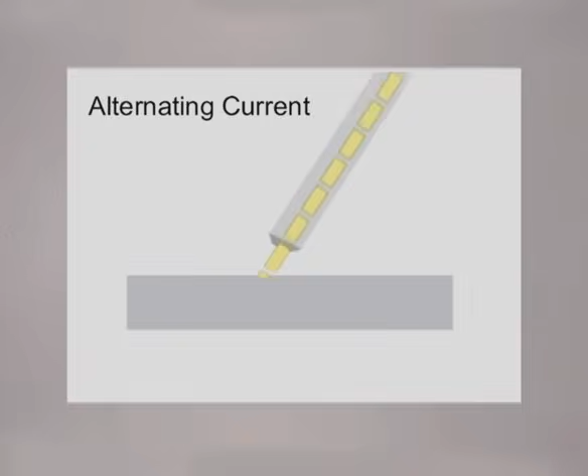Whether your welding machine is electric or portable, the power source will provide either alternating current or direct current to the electrode. Alternating current flows in both directions, creating an amperage lag. Certain welding rods have been designed with stabilizers in the flux to help maintain the arc through these lags.

Direct current welding machines provide a steady flow of current in one direction. The direction of flow, called polarity, is determined by how the leads are connected to the welding machine. DC plus with electrode positive is the polarity typically used for shielded metal arc welding.

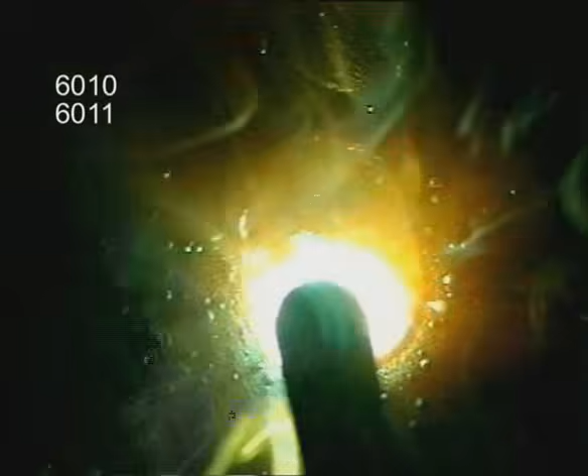All the common rods used for welding on carbon steel have characteristics that make them better suited for different situations. The fast freeze rods have a strong arc force that helps burn off surface impurities. A circular or side-to-side motion can be used to build up weld, or because of the light flux coating, these rods can be whipped to provide maximum penetration.

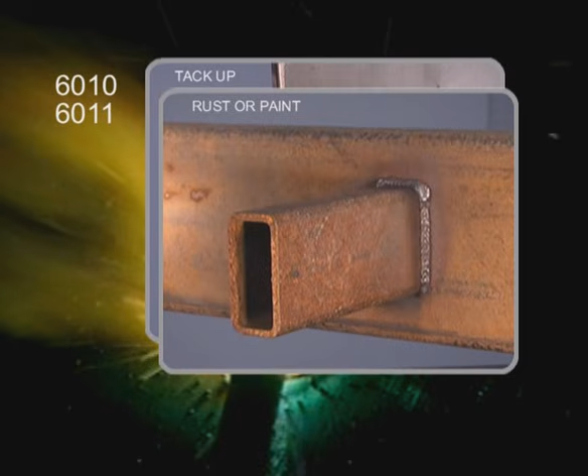In the vertical weld position, 6010 and 6011 can be run either uphill or downhill. These are good rods for tacking up weld joints, welding metal that is slightly rusted, filling gaps in poorly fit joints, and as a first pass for good penetration.

The filler rods don't penetrate as deep, they build up weld. Stabilizers in the flux make 6013 one of the simplest rods to use. With a slightly heavier slag covering, try to keep the arc in the puddle. 6013 can also be run either up or down on vertical welds. For general purpose welding, 6013 produces a smoother finished weld bead.

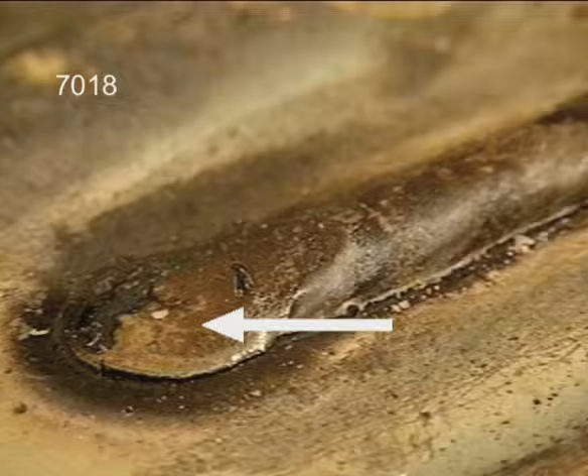7018 contains iron powder in the flux and low hydrogen characteristics. Except for directly under the arc, a heavy slag covers the entire weld puddle. Either running straight or with a side-to-side motion, the arc needs to be maintained on the leading edge of the puddle. In the vertical position, 7018 is run uphill.

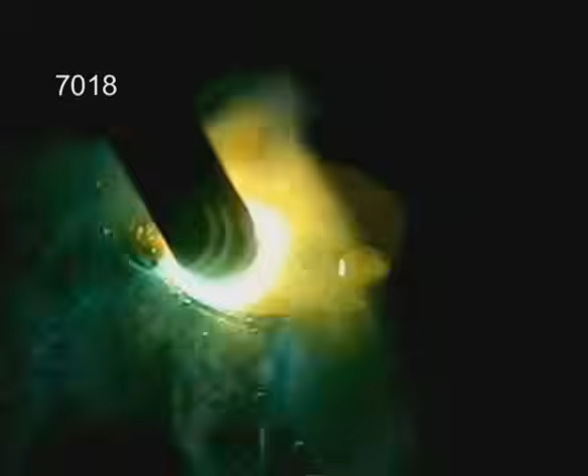7018 requires better rod control, but does provide the strongest welds for heavy stress situations and also the smoothest welds for ornamental type projects. Welding rods are available in different amounts, and it's a good idea to have both fast freeze and filler rods on hand.

Cover yourself up. Wear some good gloves, a hat, keep clean lenses in your welding hood, and always wear safety glasses. Before you light the rod, get comfortable. Scratch to light the arc. Bring the rod back and start the puddle.

Maintain a uniform arc gap with the amperage set high enough to let the puddle spread out. The molten metal follows the heat. Make sure you're filling in along the edges to avoid undercut. Add a little extra metal to the puddle before pulling out back over the weld.

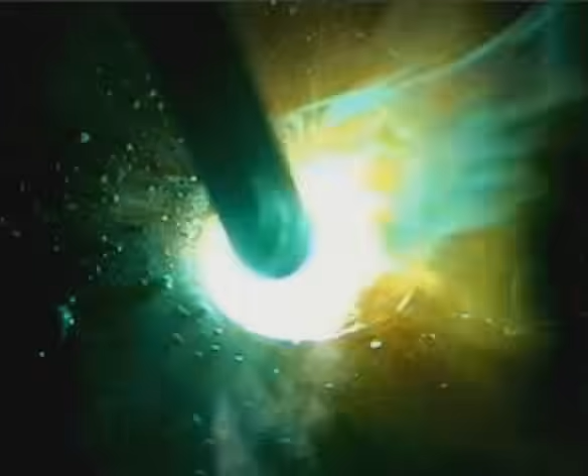You should always examine the finished weld bead for any defects, but really, you need to see the weld as it's going in. This is a totally manual process. You have to control the heat and filler metal during the weld by watching and understanding the molten puddle.

Look past the rod and the light, focusing directly on the molten pool. Watch the edges and the weld buildup, constantly analyzing how it's flowing out and how fluid it is, making slight adjustments when necessary. The amperage setting, which regulates the amount of current flowing through the rod, is the main control

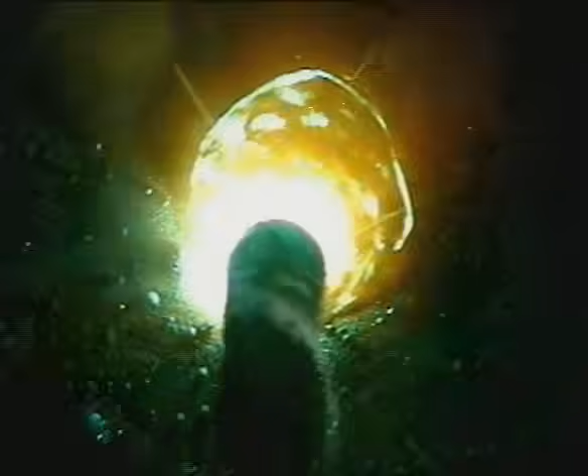of the heat available to the weld. When the amperage is set too low, the puddle only forms under the rod. Increasing the amperage generates enough heat to form a molten pool. Along with starting to get penetration, this is where you begin to have control of the edges of the puddle and the weld buildup. There isn't an exact amperage setting here.

In fact, this is one of those things that welders see differently. Also, as the metal thickness or weld position changes, the amount of heat required will be different. Watch the puddle. You're looking for it to flow out to the sides of the rod.

When the amperage is increased more, the molten pool penetrates deeper and spreads. Eventually, the filler metal becomes so fluid and agitated you can no longer control it. Experiment with the amperage setting. For good penetration and smoother welds, you want the amperage set as high as you can while keeping the molten metal from becoming too fluid to handle.

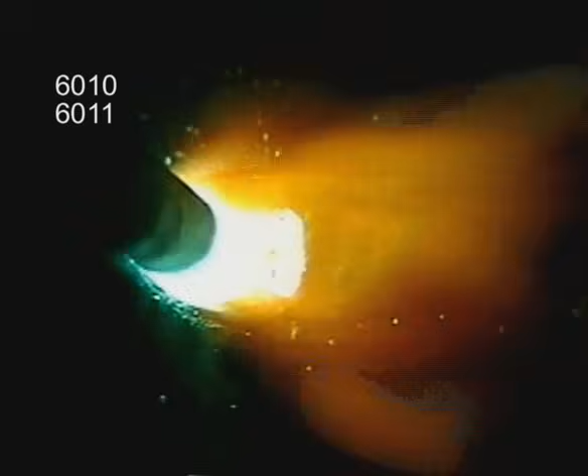Because of the characteristics of the flux coating, the puddle will look different depending on the type of rod you're using. The entire puddle is visible with 6010 or 6011. Slag covers the top rim of 6013, but the molten metal is still visible on the sides, and the puddle should move easily with the rod. With 7018, slag covers the entire puddle, but you still want to see it flowing out to the sides, with the slag solidifying back from the rod.

During the weld, the filler metal is actually solidifying underneath while the slag stays molten. In the horizontal or vertical position, the slag can run or drip. Don't let this fool you into thinking the weld is too hot. You'll probably need to experiment more to set the amperage for 7018, but you'll get better results running a little to the hot side.

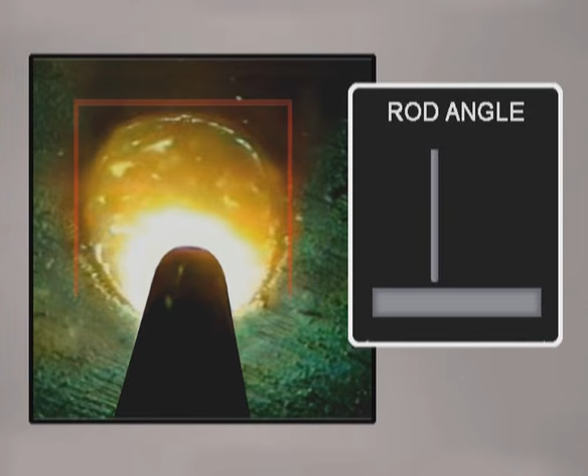Regardless of which rod you use, the amperage only provides the heat. The rod angle determines how fast the metal will heat up. When the rod is held more perpendicular, the molten pool forms and spreads quickly, allowing a faster travel speed to limit penetration on thinner metals, deposit less metal for a smaller weld, or flatten the bead in a bevel.

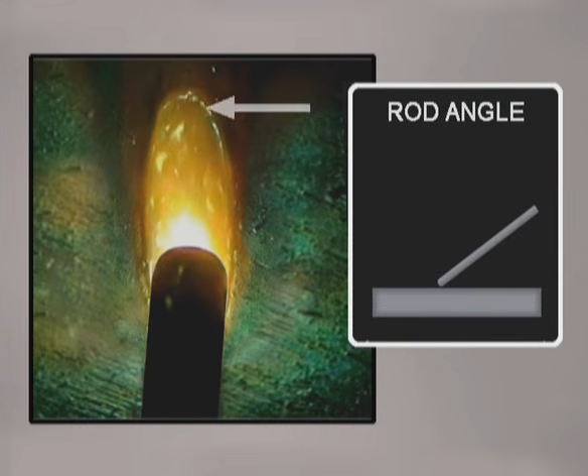As the rod is angled, some of the heat is taken off the metal. A slower travel speed can be used to build up a crowned weld bead. If the rod is angled too much, the metal won't get hot enough. The molten pool will narrow, the bead will stack up, and you'll lose control of the edges of the puddle.

On most weld joints with a good fit up, you want to maintain a consistent rod angle to produce a uniform weld bead. In some situations, though, you may need to vary the rod angle during the weld. To fill a gap in a weld joint, the rod can be angled more, slowing down to deposit more metal, keeping the build-up uniform, then angled back up to finish the weld.

Controlling the rod angle takes a little practice, but you need to stay loose and relax. Whether you're holding the rod up to flatten the bead or angling it to build up weld, you want to travel at a speed that keeps the molten puddle the same size.

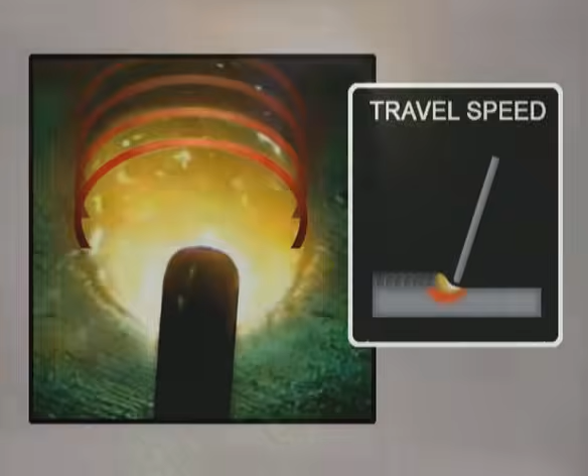Watch the puddle. If the travel speed is too fast, the metal doesn't have time to melt, so the puddle narrows. If the travel is too slow, the metal gets hotter and the puddle spreads. Depending on the rod, the filler metal may flatten out or stack up and roll. Always maintain the size of the puddle with the travel speed.

Last is the arc gap, which is the distance from the tip of the rod to the metal. Shielded metal arc welding machines use a constant current power source. The amperage is set with the voltage varying to maintain the arc. You want to avoid jamming the rod right down against the metal or long arcing too far, but you can use slight variations in the arc gap to help control the heat and shape the weld.

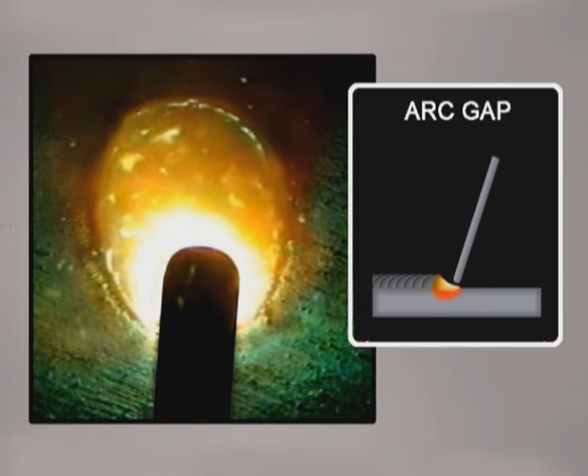This is difficult to measure, but a medium arc length is used to build up weld. Shortening the arc reduces the heat, cooling down the weld puddle. Try using a shorter arc gap on vertical up with 7018 when you want to build up more weld. Slightly lengthening the arc causes the heat to increase, spreading the puddle out, and is used with a more perpendicular rod angle for making smaller beads or flattening the weld on heavier metal.

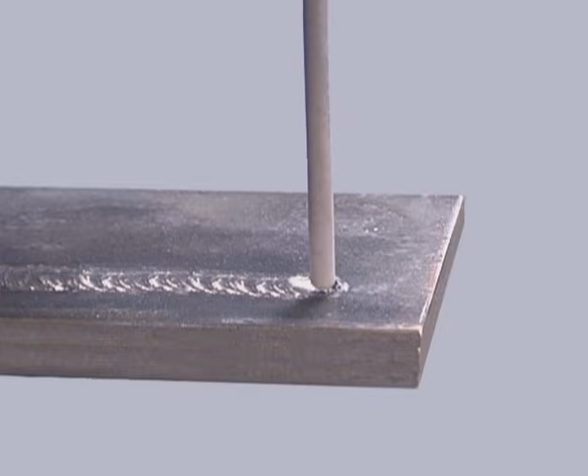It is important to be consistent though. Varying the arc gap during the weld changes the heat, making it difficult to maintain a uniform weld puddle.

When you start looking at all the aspects of running a weld bead, there are many possibilities. That's why everybody welds a little different. Practice and experiment, trying to make that puddle do what you want it to do. Watch other welders if you get the chance, but in the end, you need to see the weld puddle at the end of your rod and develop a style that works for you.

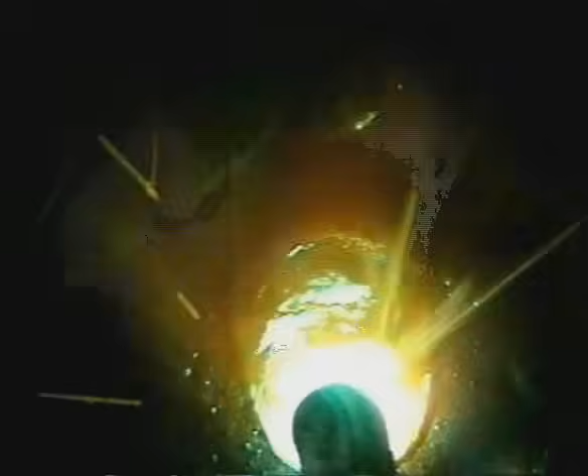We've been looking at heating the metal to allow the molten pool to penetrate and fuse. All that heat also has an effect on the base metal itself. Metal is made up of groups of atoms bonding together to form grains. When metal is heated past a certain temperature and cooled quickly, smaller grains are formed, making the metal harder. Cooling the metal slowly allows more atoms to bond, forming larger grains, which makes the metal softer.

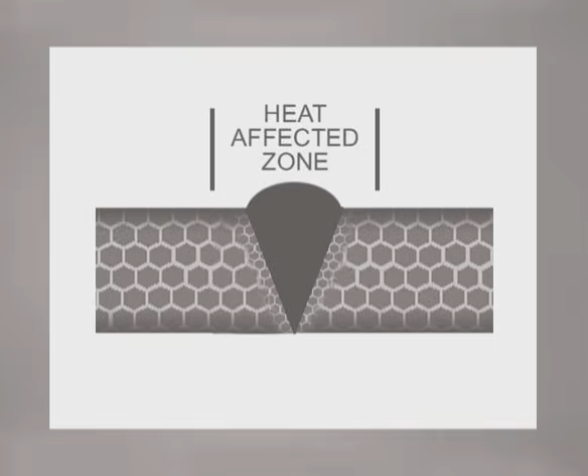In welding, the metal adjacent to the weld bead becomes hot enough to change the structure of the grains. Because only a relatively small area is heated, the metal cools quickly, forming smaller grains and becoming harder right alongside the weld. Welding also causes the pieces of metal in the joint to draw. Heated metal expands, so during the weld, the molten filler metal is deposited in its maximum expanded state. As it cools, it contracts. When the metal is free to move, it will draw in the direction of the weld.

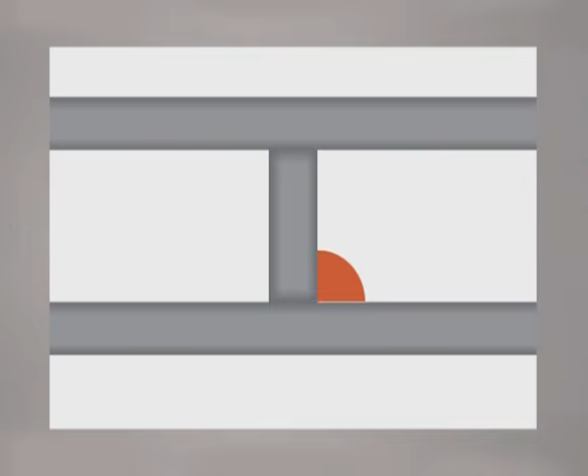If the pieces being welded are trapped, the molten weld metal still contracts, leaving some residual stress in the metal. There isn't any way to stop this, the metal is going to move. Whenever possible, weld on both sides to reduce the draw, and on pipe or square tubing, use a sequence of welds to help control the draw.

Extreme differences in temperature do have a greater effect on the metal. If it's freezing cold, use a torch to heat the metal up a little. Condensation will appear, so just warm it up until the moisture dries. Also, if you are welding on harder, higher carbon steel, which does not handle expansion and contraction very well, a preheat may be necessary to prevent the weld from cracking as it cools.

As always, there are a lot of variables, the type of steel and the stress that will be put on the finished product. In most cases, projects are designed so that the stress put on the weld joint does not come anywhere close to the maximum strength of either the metal or the weld. Try to complete the weld once you start it and avoid building up more weld than necessary. When you're finished, let the metal cool slowly. If the metal does break next to the weld, you may need to take a closer look at the thickness of the metal being used and the overall design.

Okay, let's take a look at putting two pieces of metal together.

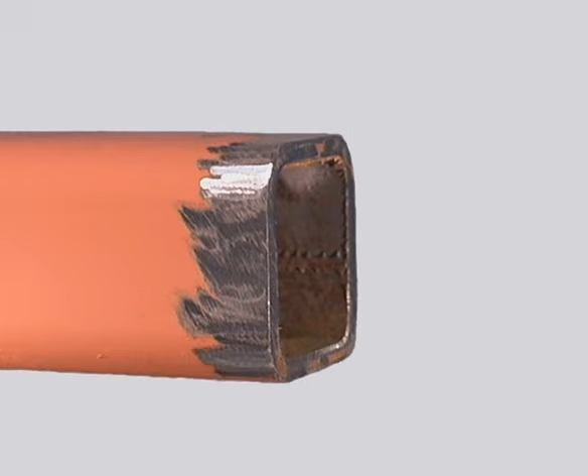The first steps with any type of weld joint are metal preparation and joint fit up. If you're working with new metal, most of the rods can handle the mill scale, which is a dark layer on the surface. Use a grinder to clean any metal that's rusted or painted. Impurities on the surface can cause porosity, lack of fusion, or even interfere with the arc.

When you're cutting metal, keep the edges straight and square. If you use a torch, chip or grind off any slag left from the cutting process. During fit-up, use good tacks to hold the pieces together, and if you're leaving a gap, keep it uniform. Irregular gaps in the joint not only take longer to weld, they make it way more difficult than it should be. You can avoid a lot of problems by cleaning the metal and taking your time on fit-up.

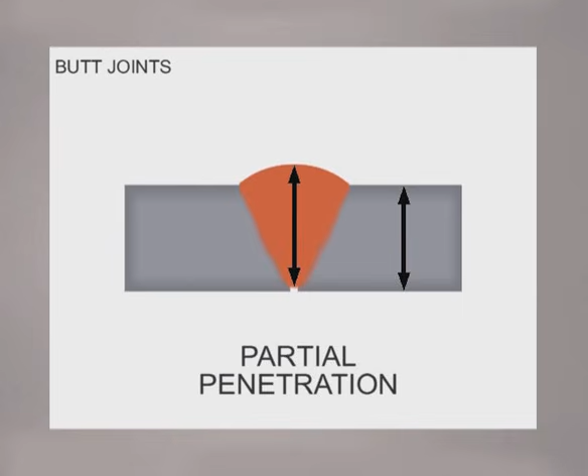While there are many variations of weld joints, there are generally considered to be 4 types: butt joints, lap joints, T-joints, and corner joints. On a butt joint, the weld should penetrate deep, with the amount of weld deposit at least equal to the thickness of the metal. For maximum strength, 100% penetration welds are used to completely fuse the edges.

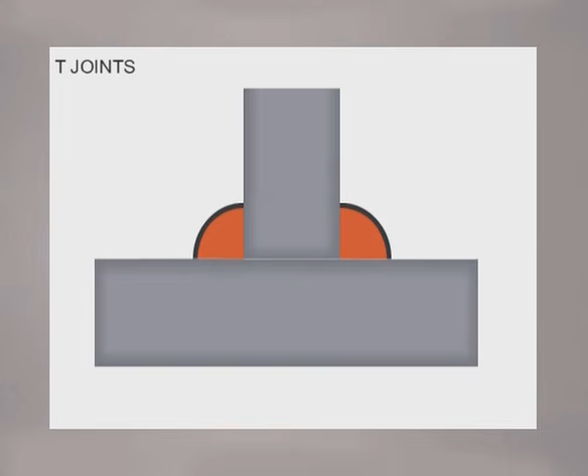On a lap joint, the weld is called a fillet, with the legs coming up and out a distance equal to the thickness of the metal and the weld slightly crowned. A fillet is also used on T-joints, where the edge of one piece is joined to the surface of another. Welding on both sides reduces the amount of weld necessary and overall produces a stronger joint. Corners are joining the edges at an angle, with metal preparation or fit-up allowing for sufficient penetration and weld deposit.

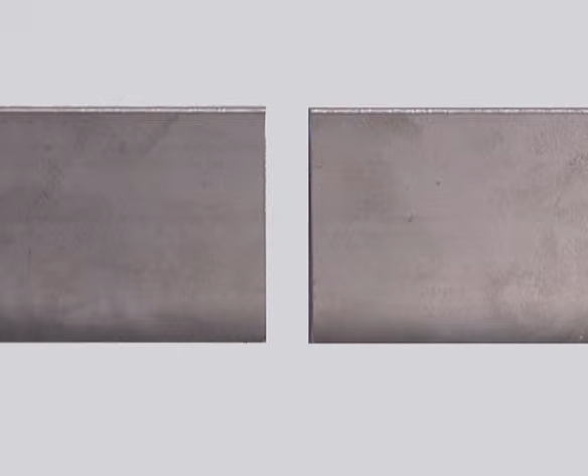Let's start with butt joints, and this can be on plate, flat bar, angle iron, pipe, or square tubing. When the metal is around 1/8 of an inch thick, keep the edges straight and square for a perfect fit. You'll generally get good enough penetration just butting the pieces together, especially if you can weld on both sides or all the way around. On plate or flat bar, tack right on the outside edges to help carry the heat.

For square tubing, tack the corners, then weld opposite sides from tack to tack. If you intend to grind the weld off for a smooth finish, you can leave a very slight gap, but keep it uniform. Whenever possible, start at the outside edge and weld towards more metal.

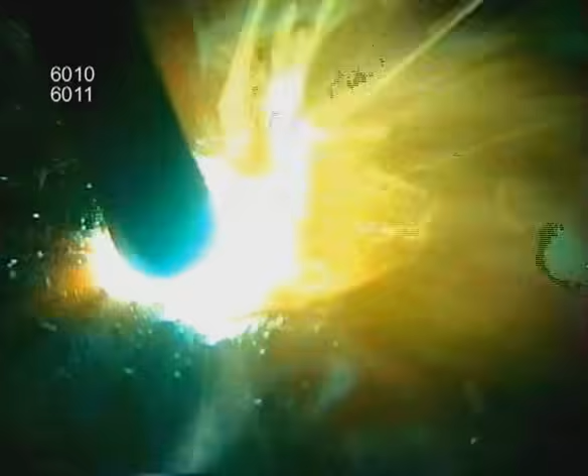In the flat position, hold the rod fairly perpendicular to the metal. You can weld with 6010 or 6011 using a circular motion. Turn the amperage down a little, but you're going to have to travel faster to control penetration and avoid burning through.

For a smoother finished bead, try 6013 or a 3/32 7018 with a side-to-side movement. On a horizontal, hold the rod nearly perpendicular to the weld. Watch the puddle. With 6010 or 6011, adjust the travel speed to let the puddle spread out without overheating the metal. Watch the top side to avoid undercutting.

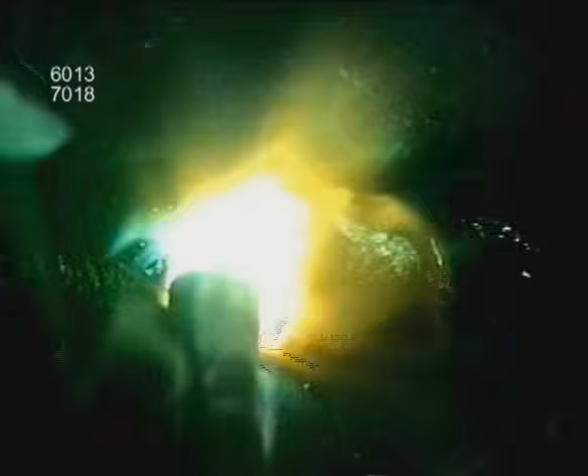With 6013 or 7018, try running straight without any rod movement, maintaining a uniform arc gap and travel speed. If you can position the joint, butt welds on 1/8 metal are easier welded vertical down. 1/8 metal is fairly thin for stick rod, so use some practice metal to figure out the amperage and adjust your travel speed.

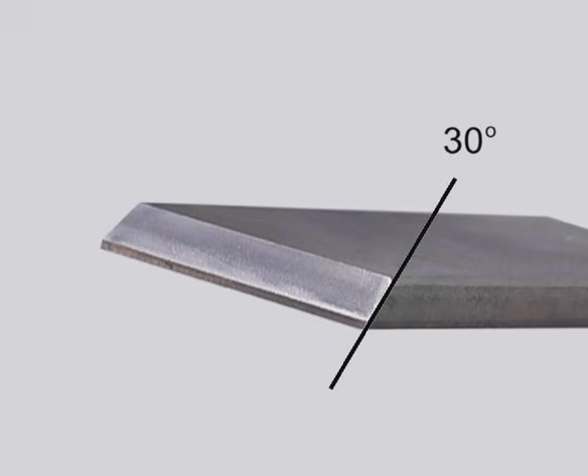Starting at 3/16 of an inch, you want to bevel the edges to allow for good penetration. Bevels are generally around a 30-degree angle with the top edge straight and a flat spot called a landing on the bottom. Hold the grinder at a slight angle, using the bottom corner of the disc to take off metal.

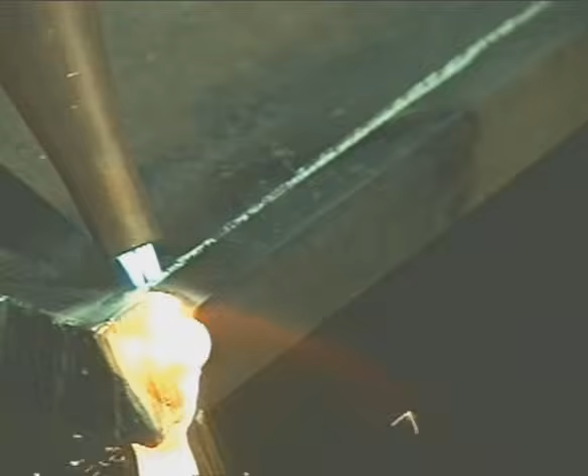When you have it close, hold the grinder flat to smooth the bevel and straighten the top. On heavier metals, it may be easier to cut the bevel with a torch, then finish it with a grinder.

The reason for beveling the edges is to control the puddle deep in the joint. If the bevel isn't wide enough to get the rod into the bottom, you can always take the grinder up on edge, slightly cock, and use the curve of the disc to open the bevel up a little more.

A beveled butt weld can be divided into 3 parts: the root, which is the first pass fusing the bottom of the joint, the filler, and the cap.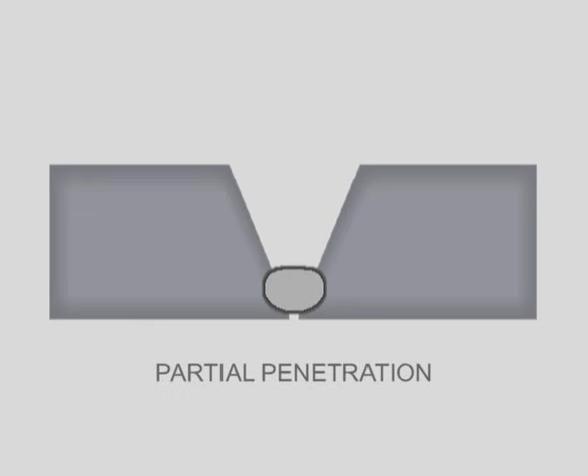There are several options in fitting up butt joints, and the main difference is how the root pass is welded. The bevel pieces can be fit up with a small gap, allowing the first pass to penetrate as deep as possible. For 100% penetration, either a backup bar is used, with the first pass fusing all 3 pieces, or the metal is fit up with a gap, and the root fuses the bottom edge and actually builds weld on the back side. After the first pass, filling and capping is basically the same, so let's take a closer look at getting the joint started.

Anytime you weld in a bevel, you want to hold the rod fairly perpendicular to the metal to flatten the top of the bead. If you angle the rod, the weld bead will crown, leaving slag that may get covered on the next pass.

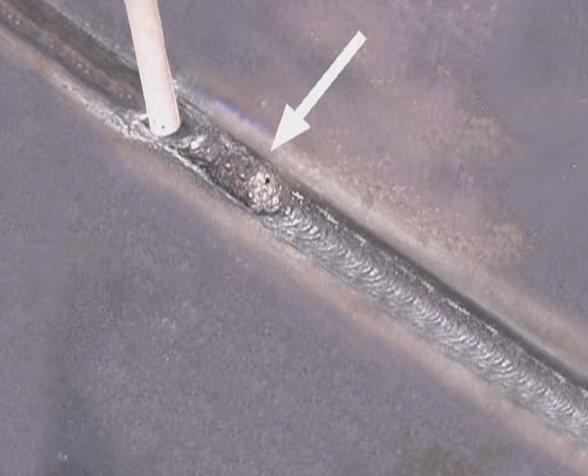You also want the weld buildup even. Use a grinder to knock down any high spots from stopping and starting. It's a lot easier to keep it uniform with a grinder than to try to fix it with the next weld bead. Also, if the bead does crown in the bevel, use your grinder to knock off the top to avoid trapping slag.

Not all welding situations require 100% penetration. That depends on the type of stress placed on the joint. But you always want to bevel the metal, leaving at least a small gap.

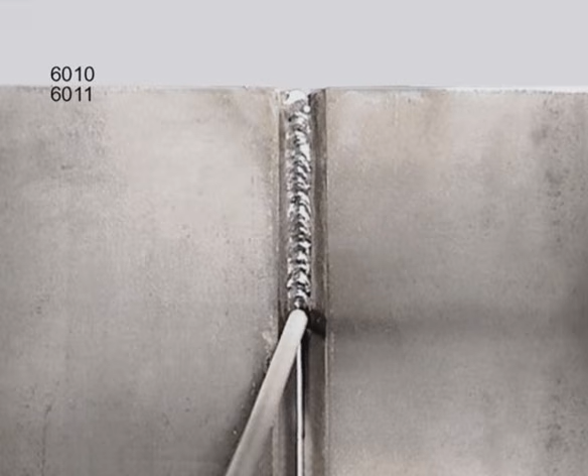6010 or 6011 will provide good penetration, and for the first pass are a little easier to deal with in any of the weld positions. You can use a whip or step motion, gouging into the metal for penetration, then pushing the puddle in to fill.

Watch both sides to avoid undercutting along the edges. For more weld buildup, try using a modified circular motion, always coming back to the leading edge of the puddle in the bottom of the joint.

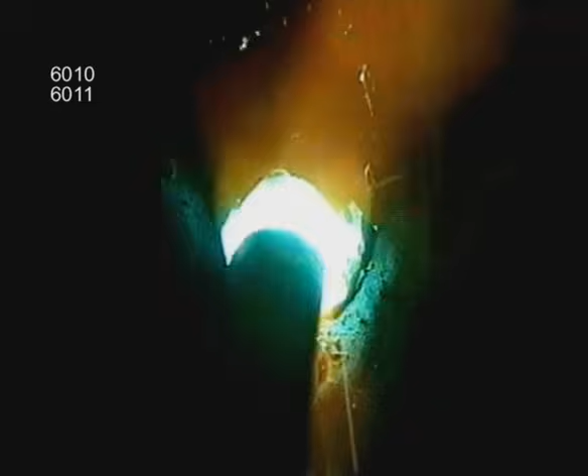If you can handle the puddle, you can also use a filler rod. With 6013 or 7018, hold the rod fairly perpendicular. Use a slight side-to-side movement and avoid jamming the rod into the sides.

Depending on the bevel and gap, you may need to follow the metal to maintain a uniform arc gap. The base metal is getting thicker as you come up the bevel, taking more heat. During the weld, you want to see the edges of the puddle flowing out and tying in on the sides of the bevel.

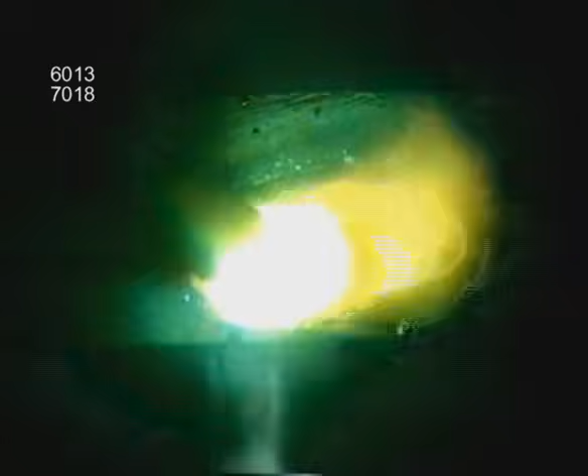After the first pass, chip the slag, clean it with a brush, and you're ready to fill and cap. If you can get to both sides of the metal, you can weld the backside for a stronger joint.

Grind down to clean metal, keeping the depth and width uniform. With the rod angled a little more, slow the travel speed and build up welds slightly wider than the groove and above flush with the surface.

Some welding situations require complete penetration for strength. If the pieces being joined do not fit up perfectly, or with some grades of hardened steel that tend to crack on the first pass, a backup bar is used.

A V-bevel with a backup bar is also the procedure for structural welding tests. The goal is to melt and fuse the bottom edges of the pieces being joined to the backup bar. Prepare the bevels with slightly less of an angle and a feathered edge.

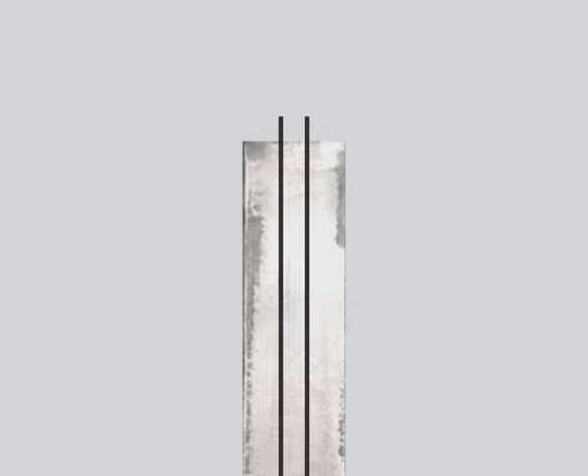Grind off the mill scale on the backup bar. Only a narrow strip is going to get tied in, and you don't want surface impurities taking the heat. Fit the backup bar tight with around 1/4 inch gap. This type of joint is generally welded all the way with at least a 1/8 7018, and you have to be able to get the rod all the way to the bottom.

Either tack up on the backside, staggering the tacks, or in the bevel. When you tack in the bevel, grind the starts and stops thin. Always keep in mind, along with fusing the pieces at the bottom, you also want the top of the weld relatively flat to avoid trapping slag.

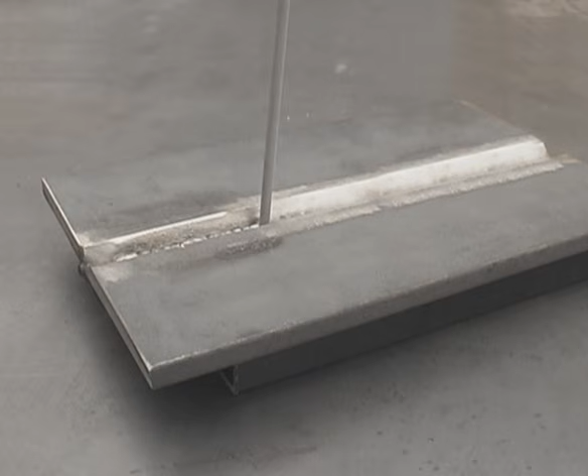In the flat position, hold the rod nearly straight up and down, angled slightly back towards the weld. Keep the arc on the leading edge of the puddle. With a slight side-to-side movement, pay attention to the arc gap. You want to see the edges of the molten pool tying into the sides of the bevel to avoid crowning the bead.

When you're using 7018 in a bevel, stay ahead of the weld buildup and slag. If molten slag is pushed in front of the rod, it can interfere with the arc or limit filler metal fusion along the sides.

On vertical up welds, you won't have any problems fusing the base metal to the backup bar. You do want to keep the weld bead flat without undercutting along the edges. Keep the rod fairly perpendicular to the metal, angled up slightly. The puddle needs to flow out on the sides for a flat weld bead and to avoid undercutting.

Travel up fast enough to keep the metal from overheating, which causes the molten puddle to spill down. You may need to lower the amperage a little, maybe 5 amps or so, but don't lower it too much, as many problems are caused by running too cold on verticals as by running too hot.

Remember, the amperage only provides the heat. It's the travel speed, rod angle, and arc gap that determine just how hot the metal is going to get.

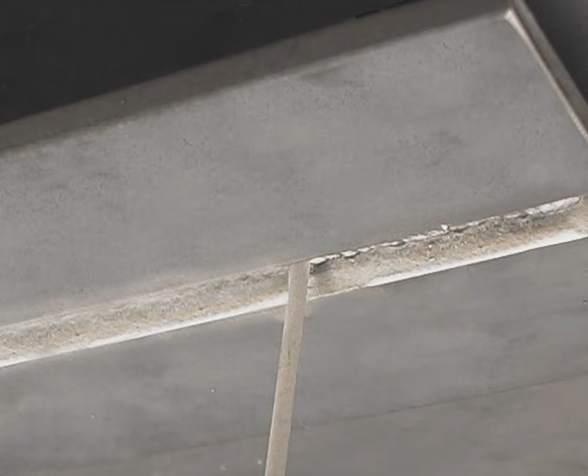On overhead butt joints with a backup bar, you don't get to build up quite as much weld bead. With the rod nearly straight up and down, adjust the travel speed to let the puddle spread out without overheating the metal. Most of the problems with overhead come from not controlling the rod.

When the tip dances around, varying the arc gap, the amount of heat at the weld is not uniform and focused. Find some way to steady yourself so you can control that rod.

Also, if the rod is angled too far back towards the weld, the molten filler metal takes the heat instead of the metal, causing the puddle to drip.

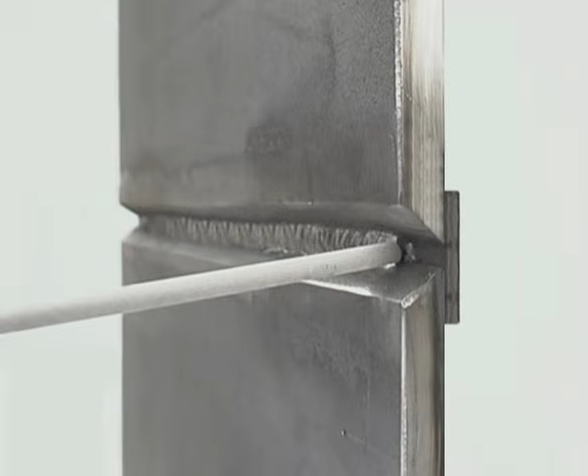Horizontal is generally not used for welding tests, but you often get them in practical situations. Angle the rod up and slightly into the weld. The bottom bevel acts as kind of a landing, helping to hold the weld, so you may be able to use a slight rod movement.

Watch the top side and push the puddle up. Set the amperage to allow a fast enough travel speed so the base metals don't overheat, which causes the puddle to become too fluid. Don't try to carry a lot of metal on a horizontal. Just get all the pieces tied together and keep the filler metal from sagging.

The last type of root is in a V-beveled open butt joint. We're going to shove a 6010 rod deep into the gap and run a weld bead on the back side of the metal. Preparation and fit up are more critical, so take your time getting the metal ready.

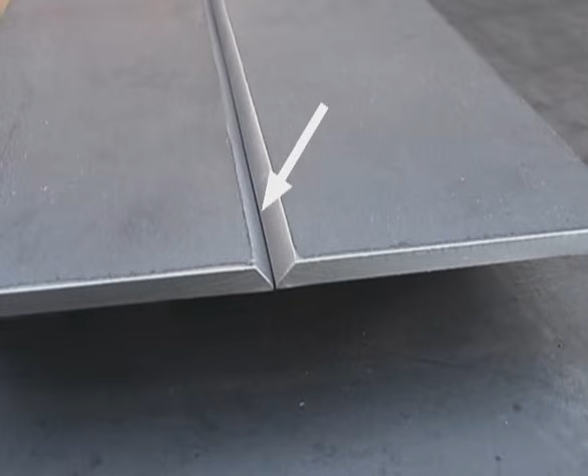The edge of the bevel needs to be straight and square. Grind off all the mill scale on the bottom side. A half-round file works good to clean up the inside of square tubing or pipe.

The landing should be uniform. Use a file to knock down any high spots. With a 1/8 6010, I use a 1/16 oxyacetylene welding rod as a spacer with around a 1/16 landing. The size of the gap and landing can vary a little, but when you figure out what you like, try to keep it consistent for every weld you make.

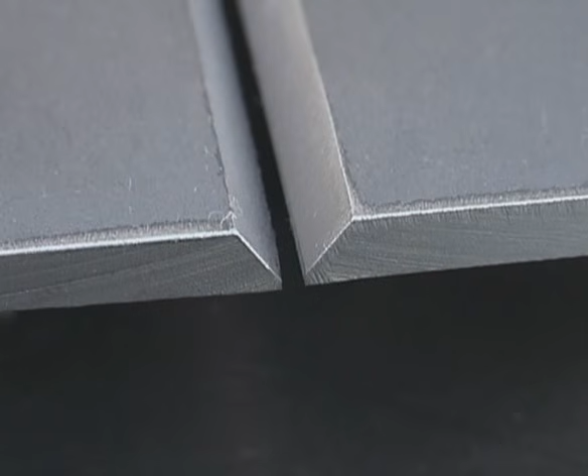Line up the bottom edges of the metal, with a spacer to adjust the gap, run one tack, pushing the rod right down into the gap. Before you finish tacking up, remove the spacer. As tacks cool, they contract and the spacer gets jammed up. So pull the spacer, make sure the gap is uniform, and finish tacking the joint.

On heavier pieces, after the first tack, use a small wedge or a screwdriver to keep the gap uniform. Because of the taper, you can remove these after the joint is completely tacked. On square tubing, tack opposite corners. For pipe, opposite sides. Make sure the gap is uniform, straightening when necessary, then put in two more tacks.

Flat, horizontal, overhead, and vertical down root passes are all done the same way. Grind the edges of the starts and stops thin. Hold the rod perpendicular to the metal. Scratch start right on the tack.

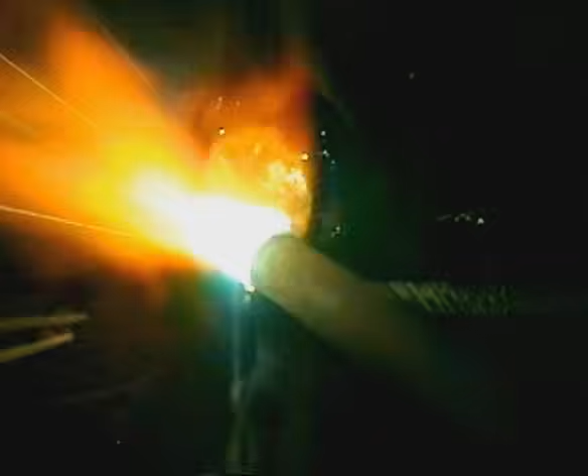Push the rod down into the puddle and start moving. The filler metal will squirt out the back until you hit the thinned out edge of the tack and it can poke through. Then move as fast as you can keep the gap filling in. If you're not getting all the way through, you will see filler metal squirting out behind the rod, back up in the bevel.

Most of the light and sparks will be on the back side, and you're building weld on the back of the metal. You want the amperage relatively high, so try starting about the same place as you'd run flat.

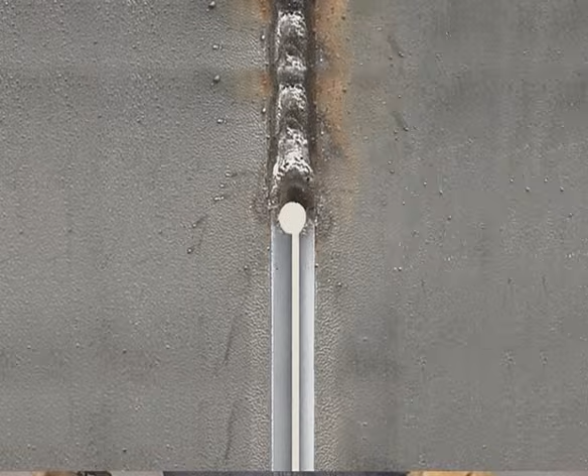If you do open a hole, stop right away, pulling the rod back over the bead. Restart right at the edge and keep going. When you finish the weld, grind the edges thin on both sides of the hole and fill it in.

Some welding procedures require a vertical up root pass, and generally you'll need to run about 5 amps lower for uphill. The easiest way is to prepare the metal exactly the same, with a uniform narrow gap, shoving the rod in perpendicular and moving up as fast as the gap fills in.

Some welders like to thin out the landing a little more, and with a step motion, rip a small keyhole, then fill it in, rip a hole and fill it in, always keeping the rod deep in the gap.

Other welders like to leave a little thicker landing and wider gap, here again using a step motion, laying metal in and making sure it's fusing on the bottom corners.

The disadvantage to stepping the root is the possibility of undercutting along the edges on the back side. The advantage is that you actually see the root going in for 100% penetration. Stepping the root uphill also works well when the gap is uneven with wide or narrow spots.

The backside bead should be above flush with the entire bottom edges of the bevels melted and fused. Any missed spots are called insufficient penetration.

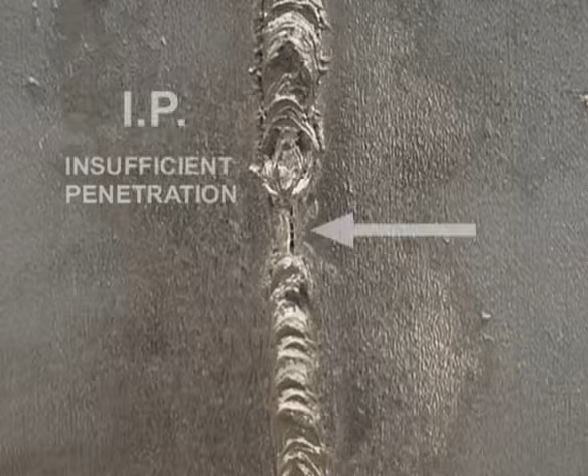If the travel speed was too slow, the bead stacks up on the backside, causing excessive penetration. On the front side, because the rod was jammed right down against the metal, the bead will crown and undercut along both sides. Grind this out to avoid trapping slag.

The metal will be thin from grinding, so you need to run another bead called a hot pass to add a little more metal and burn out any slag left behind.

With 6010, try stepping in the hot pass, not gouging quite as deep on the backstroke. Use a faster travel speed so you don't burn through, and watch the sides to avoid undercutting.

You can also hot pass with a 3/32 7018. Hold the rod fairly perpendicular. Carry the heat on the sides, moving across the center relatively quick.

Don't try to build up a lot of weld, and make sure the sides of the puddle flow out so the top of the weld stays flat.

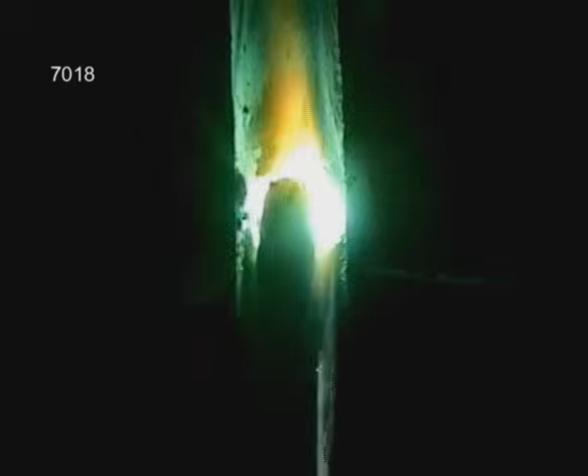Once the bottom of the joint is fused with any of these procedures, you're ready to fill and cap, and you will get better results using 6013 or 7018.

If the metal isn't too thick, you may be able to finish with one more pass. On heavier metal, when more filler is required, remove all the slag between passes with a chipping hammer and wire brush. This comes with experience, but plan the weld.

When several filler passes are required, overlap the edges of the previous beads if possible. The last filler pass should be slightly below flush. Try to leave the top corners of the bevel.

With a slight side-to-side movement, pay attention to the arc gap. Don't jam the rod into the sides of the bevel. Keep the rod fairly perpendicular and the puddle flowing out to avoid crowning the bead.

You may need to speed up or slow down to control the amount of filler metal deposit, but try to leave the top corners of the bevel.

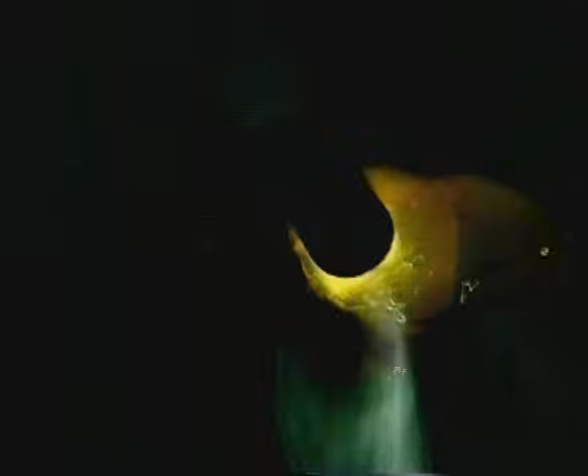To cap the weld, angle the rod and slow down to build up a crown weld bead. Use the edge of the bevel as a guide to keep the sides of the weld straight.

The finished weld should be as thick as the metal, so if you've penetrated deep, the cap only needs to be slightly wider than the bevel and above flush with the surface of the metal.

Filling up more weld than you need doesn't add any strength, just takes longer and puts more heat on the metal. If the top of the bevel is too wide to cap with one bead, run 2 or more passes side by side to cap the weld.

With a slight side-to-side movement, using the bevel as a guide, keep the outside edge of the first bead straight. Use the inside edge of the bead as a guide for the second pass. Adjust the travel speed and rod movement so the puddle flows out almost to the center of the first bead.

The final pass will generally be smaller. Try holding the rod more perpendicular to the metal, running straight. Use a faster travel speed for less weld deposit.

On a horizontal, angle the rod up slightly with a medium arc length. Try running straight without any rod movement. The first bead will help hold up the second pass, so hold the rod more perpendicular and travel fast enough to keep the bead from sagging.

For the final pass, try angling the rod down slightly. Travel faster for a smaller bead.

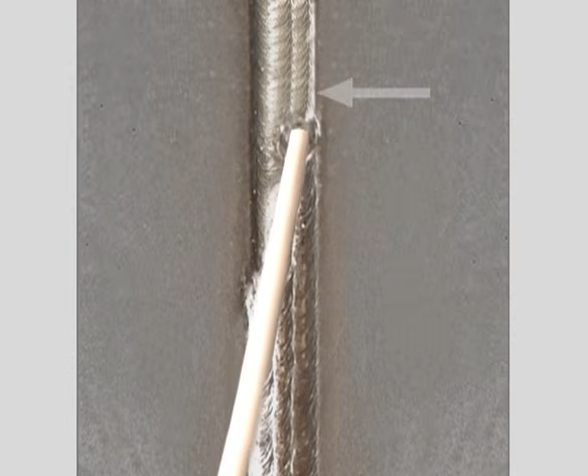On verticals, you can either use small beads side by side or run a weave bead. Small beads are easier. Use the edge of the bevel to keep the first pass straight. Run as many beads as it takes, but try to leave the other side of the bevel for a guide to keep the final pass straight.

If you're not limited to a maximum bead width by a welding procedure, you can try a weave bead. Start on one side, letting the puddle flow out to cover the edge of the bevel. Cross the center relatively quick to the other side and hesitate until the puddle flows out and covers the edge. Move the rod up a little, then cross, hesitate, move up, and cross. The upward progress is going to be slow, heating the base metal up more, so turn the amperage down a little. Use the edge of the bevel as a guide to keep the sides of the weld straight.

For a smooth weld and straight edges, maintain a uniform arc gap and keep the upward progression tight. Weaving makes it possible to build up a lot of metal, but takes some practice to consistently produce a uniform finished weld bead. Whether you're filling or capping, you need to experiment with the amperage, rod angle, and travel speed, learning to control the amount of weld deposit and figuring out just how much metal you can carry without having it sag or drip.

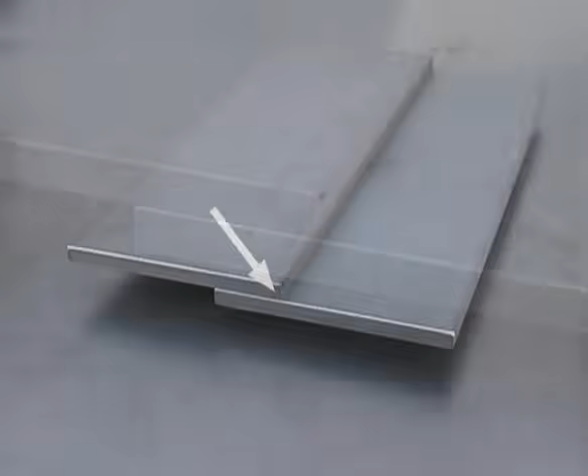With the butt joint, we were joining the edges of the metal. When one piece overlaps the other, it's referred to as a lap joint. The edge, and especially the top corner, is going to get hot and melt faster than the surface, where the heat is being dispersed in all directions. You want to fuse the bottom corner while building up a full fillet with a slightly crowned weld bead.

Lap joints can be welded all the way with a fast freeze rod, but the filler rods will produce a smoother finished weld. In the flat position, the weld is called a horizontal fillet, and you have two rod angles to consider, one in relation to the metal and the other to the weld bead itself. In relation to the metal, the rod angle determines the position of the fillet in the joint. The angle in relation to the weld controls the shape of the bead.

Holding the rod perpendicular heats the metal quickly, spreading the puddle for a flatter weld. As the rod is angled back, the weld starts to crown. There are a lot of variables. You have to watch the puddle.

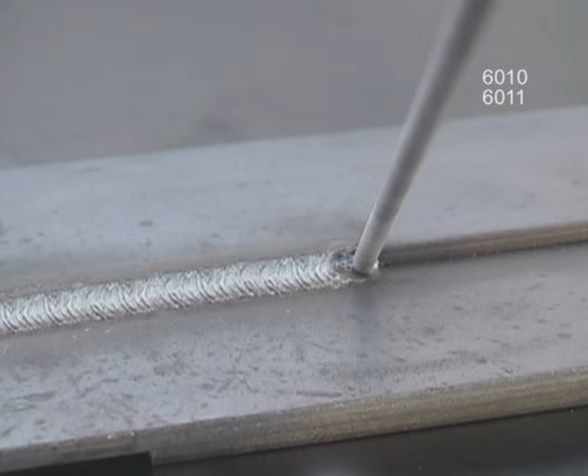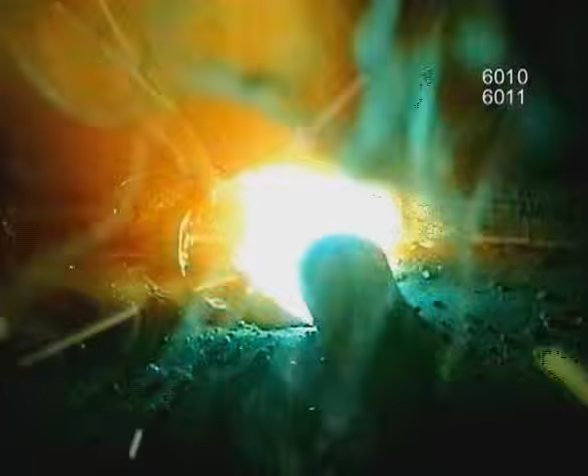With 60-10 or 60-11, hold the rod nearly perpendicular to the weld. With the arc on the leading edge, move the puddle into the bottom corner. Push it up to the top edge and bring the rod around to the leading edge. You may need to speed up or slow down to provide the heat, but always bring the arc back to the leading edge to fuse the corner. Watch the puddle flowing out to the top edge and tying in on the bottom.

The fast freeze rods provide excellent penetration, but tend to produce a flat or concave weld. Even on thinner metals, it may take a second pass to build up a full fillet. The filler rods build up a smoother weld. Maintain a constant arc gap for a uniform weld bead, adjusting the travel speed and rod angle so the puddle flows out all the way to the top edge.

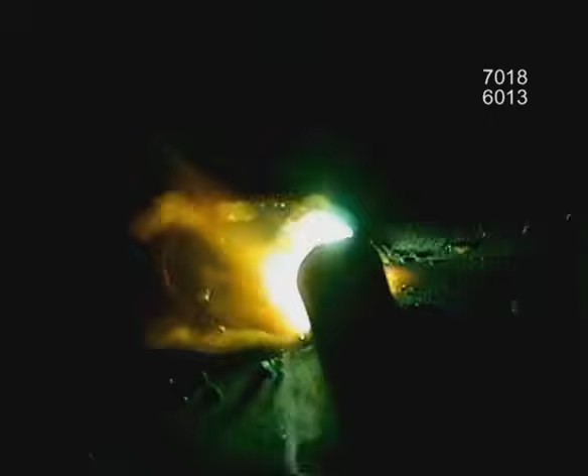Because the filler metal remains fluid longer, try running straight without any rod movement, keeping the arc on the leading edge of the puddle. On thicker metal, you may not be able to make a full fillet in one pass. You might be able to get it in two passes, the first one smaller and flat, then slowing down to carry more metal and crown the bead on the second pass. It might take 3 or more passes, and on heavy welds, use 70-18 to prevent the bottom beads from cracking. Put the first one in fusing the bottom corner.

Chip off all the slag and wire brush the weld. Determine how far out the weld needs to be, and holding the rod straighter up and down, angled slightly back towards the weld, run a bead keeping the outside edge straight. Angle the rod more into the joint and perpendicular to the weld. Then run a second pass filling to the top edge.

Overhead fillets really are like flat welds, just more awkward. Angle the rod into the corner with slight adjustments for different thickness metals. Keep the rod nearly perpendicular to the weld. Watch the puddle flowing out to the edge of the lap piece. As long as you keep the filler metal and base metal from overheating, that weld will stay right up there.

On vertical lap joints, the outside corner is going to heat up a lot quicker than the surface. For vertical down welds, angle the rod up slightly. Carry the heat on the back piece. Move into the corner, pushing the puddle to the edge, then back out. Adjust the travel speed to stay ahead of the puddle and make sure you're on the leading edge of the puddle to move into the corner.

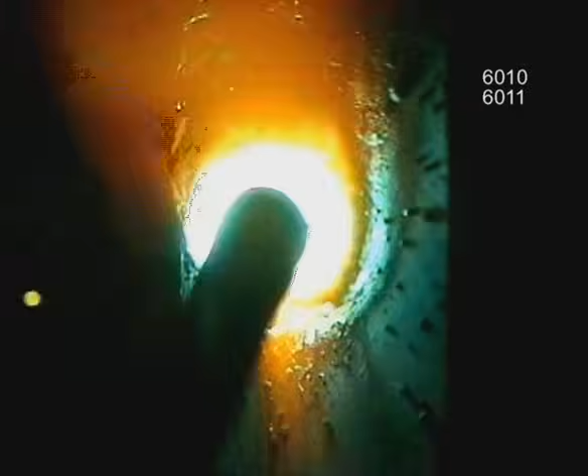You aren't going to build up a lot of weld on a vertical down, so you'll probably need to run a second pass. Vertical up with 7018 will not only provide a stronger weld, you can also build up more filler metal in one pass.

Always keep in mind that 7018 is very sensitive to the arc gap. You don't want to jam the rods into the sides or long arc across the center. Carry the heat on the back piece. As soon as the puddle flows out, move into the corner, letting the filler metal flow to the outside edge, even pulling the rod out a little if necessary to maintain a uniform arc gap. Then back into the corner and across, slowing down to let the puddle flow out.

Keep the upward progression tight and use a high enough amperage setting so you don't have to wait for the puddle to tie in. If you have any trouble running an uphill fillet with 7018, try starting out with a 3/32 diameter welding rod. The smaller puddle is easier to control.

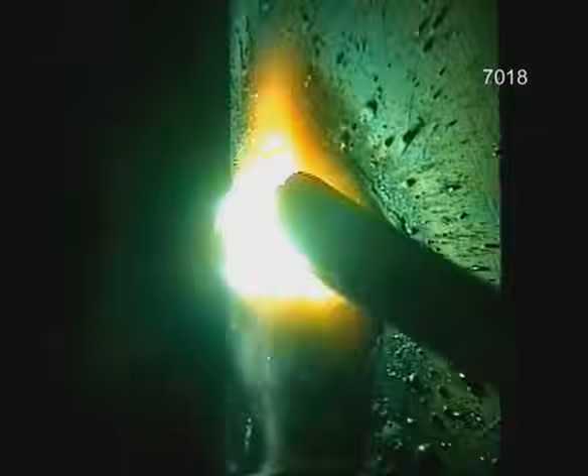You can also try stepping in a downhill pass of 6010 or 6011 first. This not only provides good penetration, it fills in the corner, making it easier to maintain a uniform arc gap for welding uphill. For heavier metal and more weld buildup, you can either stack weld beads side by side or use a weave bead.

Lap joints in any position are fairly easy to weld. The outside corner will melt away, especially on thinner metal. If the top edge isn't uniform, hold your grinder flat and skim along the edge to straighten it up.

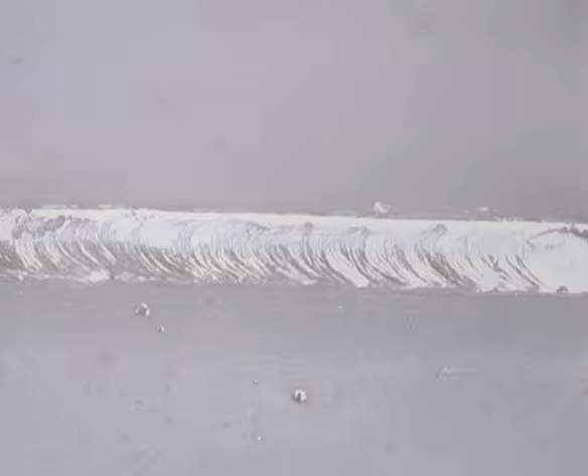A fillet weld is also used on a T-joint, and this is very similar to a lap weld, except you don't have that outside edge heating up quickly. On a T-joint, the top side of the weld is going to require more heat, so angle the rod into the corner to push the puddle up.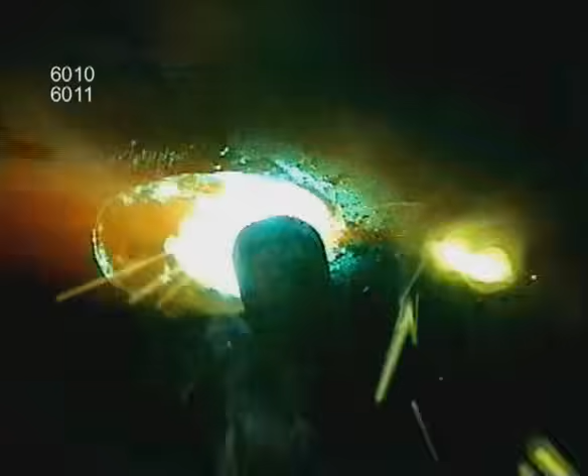If the rod is not angled enough to allow that molten pool to flow out to the top, you may leave undercut. With 6010 or 6011, always bring the arc back to the leading edge to fuse the corner. Angle the rod to push the puddle up. Watch the top side to avoid undercutting. The filler rod, 6013 or better yet 7018, will provide more weld deposit.

In the flat position, hold the rod nearly perpendicular to the weld, making sure the molten pool is flowing out both on the top and the bottom. Try running straight, maintaining a uniform arc gap and travel speed. If you need a bigger weld, try using a larger diameter welding rod or stacking up weld beads.

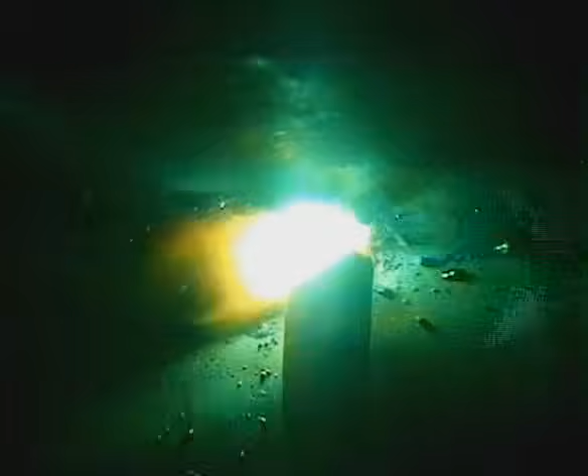Overhead is the same as flat. Hold the rod nearly perpendicular to the weld, angled to push the puddle up. Maintain a uniform arc gap and travel speed, not letting the metal or the weld deposit overheat. For more weld, stack beads from the top down.

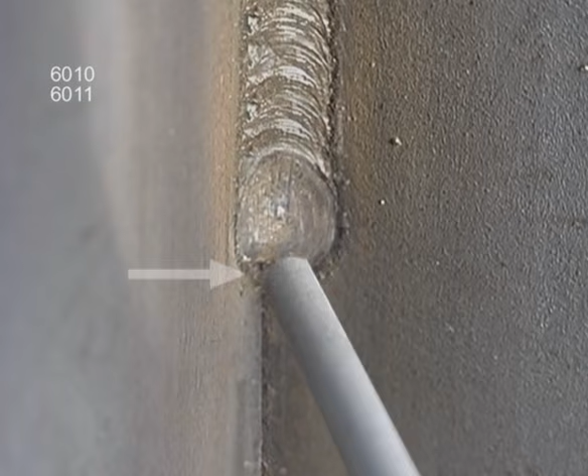On a vertical T-joint, downhill is easier. Use a modified circular motion, always coming back to the leading edge, then pushing the puddle out to the sides. Set the amperage high enough so the puddle spreads out and travel fast enough to stay ahead of the molten filler metal. Watch both sides to avoid undercutting along the edges.

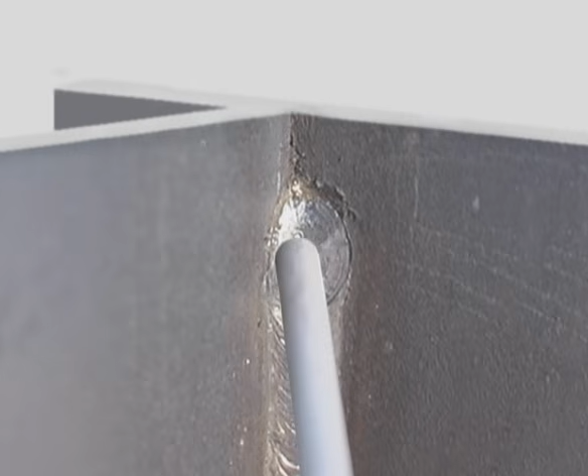7018 uphill will build weld faster. For the first pass deep in the corner, angle the rod up slightly. Pay attention to the arc gap, following the base metals into the corner and along the sides. This is very subtle. It's just a little movement into the corner as you're coming across, but jamming the rod into the sides cools the weld down, and long arcing across the center creates more heat.

Most of the problems with running uphill come from not maintaining a consistent amount of heat. When the arc gap varies, the heat varies, making it difficult to adjust the travel speed to keep the filler metal from spilling down. Try to maintain that arc gap. As soon as the puddle flows out to the side, move into the corner and across to the other side.

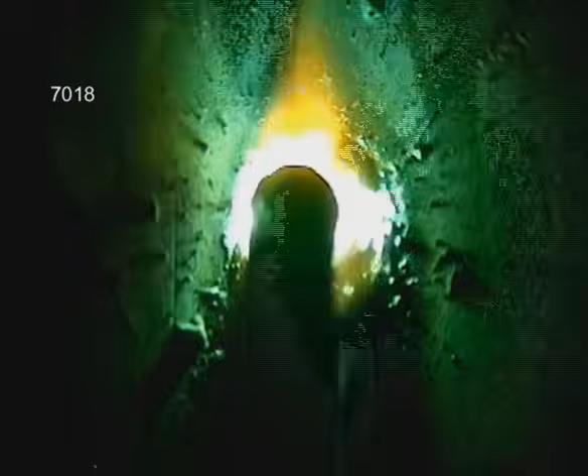Let the puddle flow out and move back. Set the amperage and adjust the travel speed so you don't have to wait too long on the sides. As you gain experience and physical control of the rod, you can try to carry more metal uphill.

But while you're learning to weld, just get that first one deep in the corner, keeping it uniform and avoiding undercut. If you need more weld, maintaining the arc gap on the second pass is a lot easier.

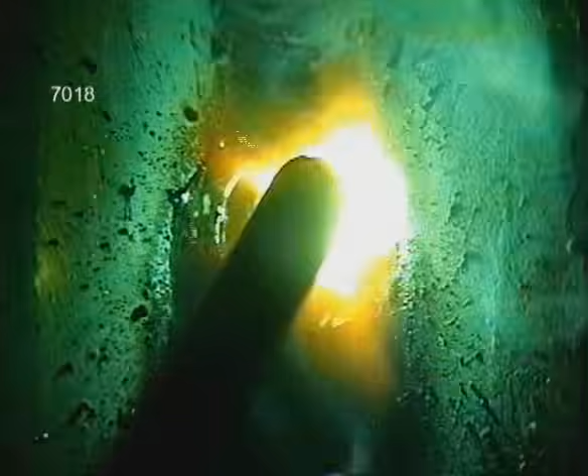Depending on the amperage setting, slow down or hesitate on the sides until the puddle flows out. Move across the center a little quicker and slow down to let the puddle flow out on the other side. Then just side to side, keeping the upward progression tight.

For heavier metal and more weld buildup, you can either stack weld beads side by side or use a weave bead. T-joints in any position will draw in the direction of the weld. If you can get to both sides, alternate welding on one side, then the other until you're finished.

Last is corner joints. Depending on the weld position and what you want the finished corner to look like, there are choices in preparation and fit up to provide good penetration.

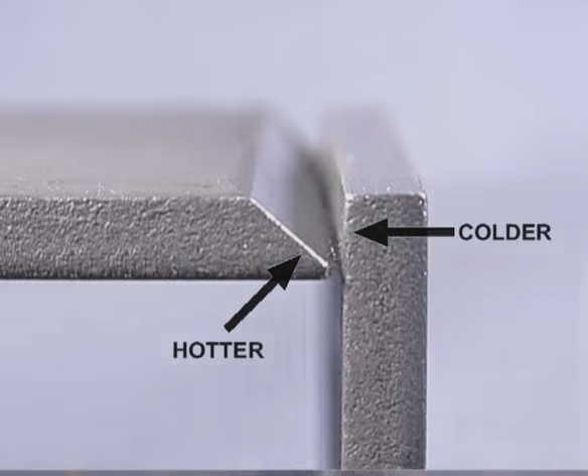One piece can be beveled at a 45-degree angle, opening it up so you can get the rod all the way to the bottom. The beveled edge is going to heat up quicker than the flat.

Angle the rod into the joint, making sure the puddle flows out and ties into both pieces. A first pass of 60-10 or 60-11 will provide good penetration and is easier to handle in the bottom of the joint.

With 70-18, try using a 3/32 diameter rod for the first pass, especially in the horizontal or vertical weld position. Keep the top of the filler beads flat to avoid trapping slag and leave the top edges as guides for the cap.

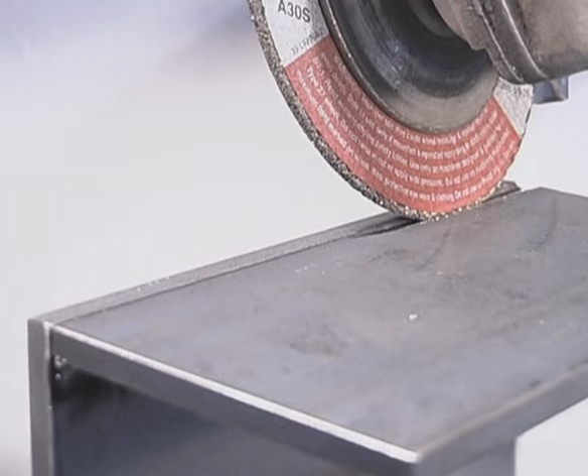On thinner metal, you can tack up the pieces without a bevel, then use a grinder to groove the joint. For ornamental type projects, you can grind the weld for a nice square corner.

Corners can also be fit up butting the inside edges. For maximum penetration, tack up leaving a small gap.

This type of fit up requires less metal preparation, and for ornamental type work, the weld can be polished for a more rounded corner or ground flat for a beveled corner.

In the horizontal position, angle the rod into the corner, fairly perpendicular to the weld, and maintain a uniform arc gap. When both pieces are the same thickness, they should heat up evenly and relatively quick.

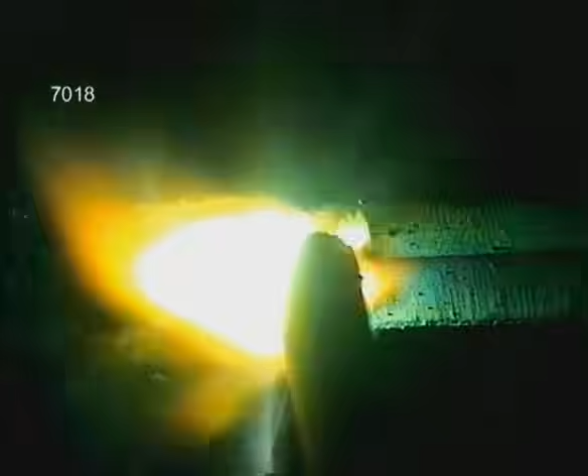With 70-18, adjust your travel speed so the puddle flows out to the top and bottom edges, but move fast enough to keep the weld deposit from sagging. Because both edges are heating up quickly, the filler metal will be more fluid, limiting the amount of weld buildup you can handle without having it sag.

If you need to make 2 passes to fill the joint, run the first one fusing the corner and out to the bottom edge. Use the second pass to fill in the top. On thicker metal, plan the weld, leaving a little of the corners for the final series of passes.

In the vertical position, downhill will make a flatter weld and will probably require more than one pass. For vertical up with 70-18, the outside edges are going to melt fast, so try using a smaller diameter rod for better control. Pay attention to the arc gap, following the base metals into the corner and along the sides.

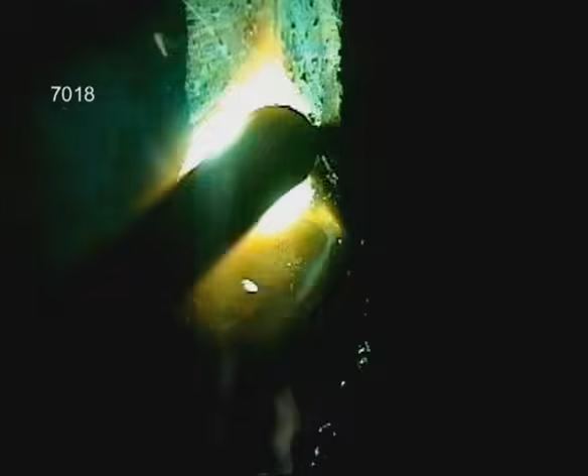Keep moving. You won't have to hesitate at all on the outside edges. On any type of corner joint, you want the amount of weld to equal the thickness of the metal.

If you have any concerns about the strength of the joint, you can make a fillet on the inside, but this will tend to draw the pieces in the direction of the weld. Whenever possible, always try to make the outside weld first.

Well, I hope I've given you an idea of how to put 2 pieces of metal together. There are many more options in metal preparation and fit up to provide for penetration, limit the effects of the metal drawing, and reduce the amount of filler metal deposit.

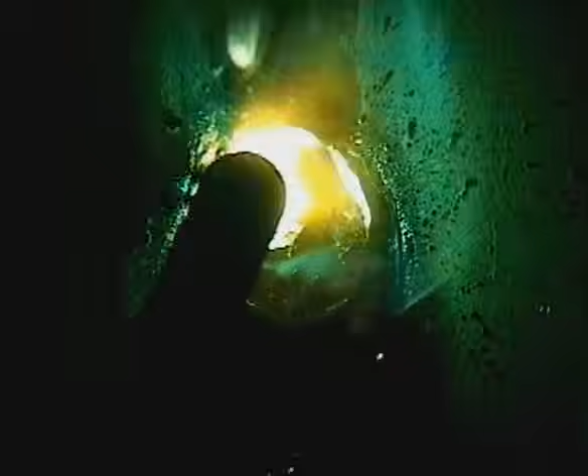Regardless of the type of weld joint you're working on, you need to experiment with the amperage, rod angle, and travel speed, learning to control the amount of weld deposit and figuring out just how much metal you can carry without having it sag or drip.

Make slight adjustments in the travel speed when necessary to maintain the puddle, and use the rod angle to control the shape of the weld buildup. Focus on the weld puddle, watching the sides tie in and keeping the filler metal from overheating. Above all else, take your time, have fun with this, and work safely.